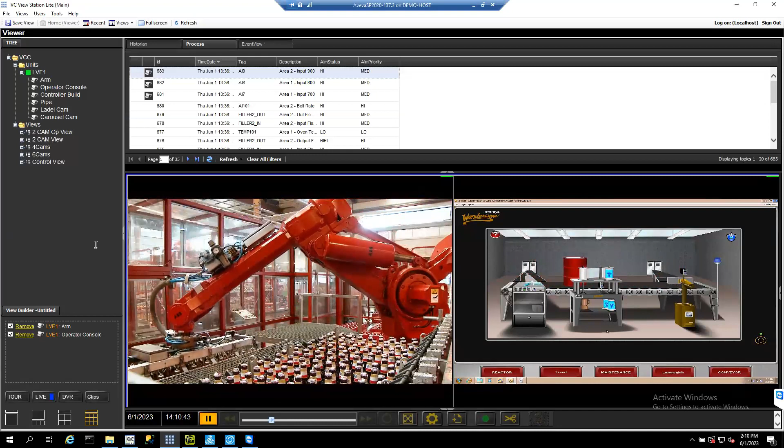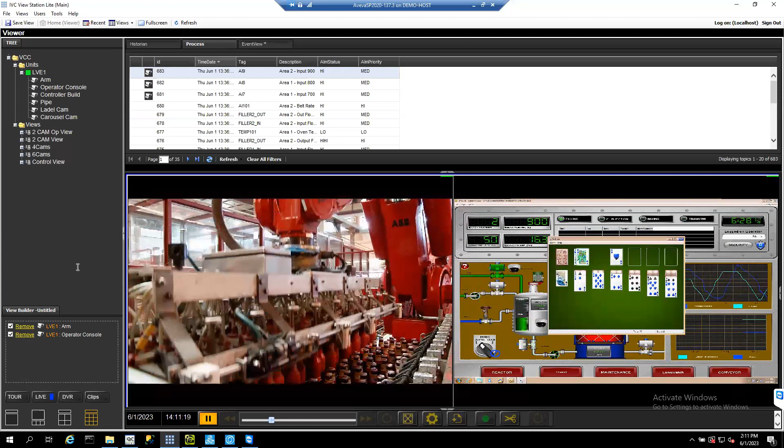This is the interface where operators would interface with the software, access any of the camera streams, whether on-premise or out at different remote sites. What we're looking at today is our software interface called View Station Lite. We also have a browser version of the software, but this VSL is a newer offering with Longwatch, and it gives operators a little more flexibility when it comes to accessing your camera streams and creating different camera views. I'll give you a quick tour of the interface and highlight some of the features.

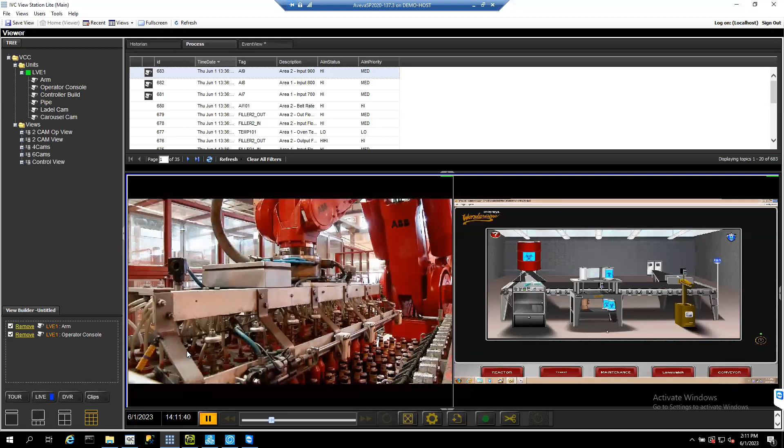Over at the top left is where you would navigate to any of the cameras set up on your system. Below that is the view builder, where you can drag and drop camera streams. Here in the viewer, we're simulating live views of camera streams. Above that, in this tabbed area, is where we're accessing all of the correlation between the video data we're recording and your process control data. I'll go through an example of where we've correlated camera streams to a SQL downtime database, for example, and how you can instantly play back those streams.

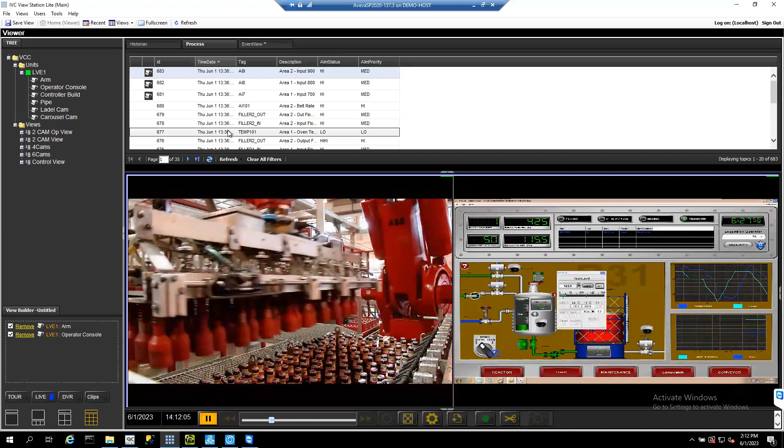Going back over to the top left, as I mentioned, this is the navigator. This is where you can retrieve any of the camera streams that you have on your console. You can select those, and you'll see it in the viewer here. Now, if this were a PTZ, or pan-tilt-zoom camera, you'd be able to move the camera stream or the camera image using your mouse control.

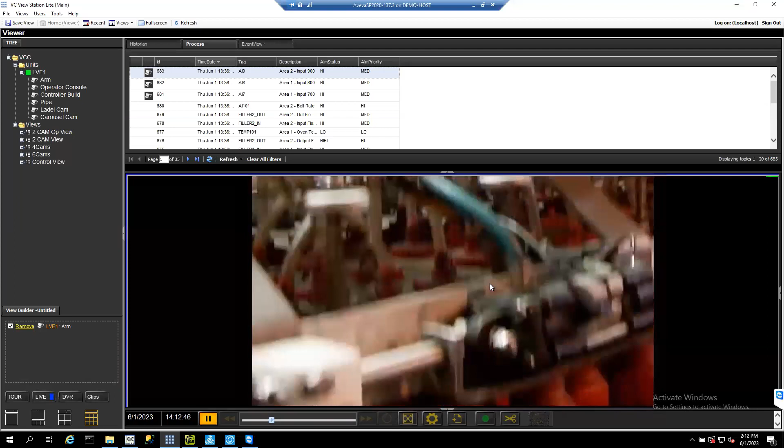There are other things you can do in the viewer, such as a digital zoom. So if you're an operator and you want to get a little more detail of a camera image without using the optical zoom, you could do a digital zoom, and that's what we're showing here. As I mentioned, you can drag and drop other camera streams, so perhaps you have multiple cameras of a process that you want to view together.

You can drag and drop those into the view builder, and now you'll have multiple streams.

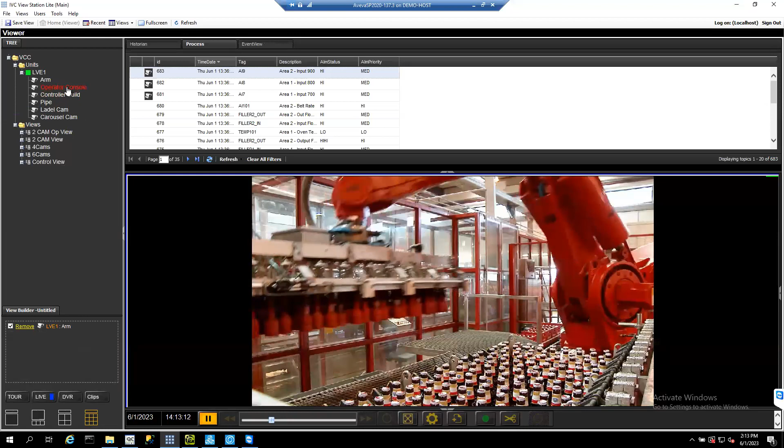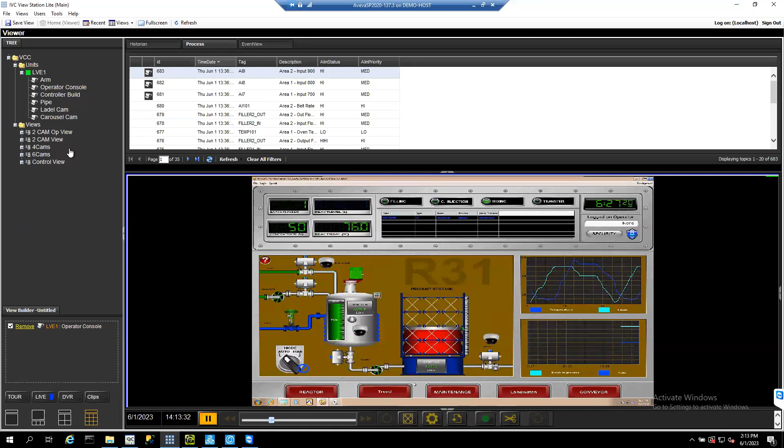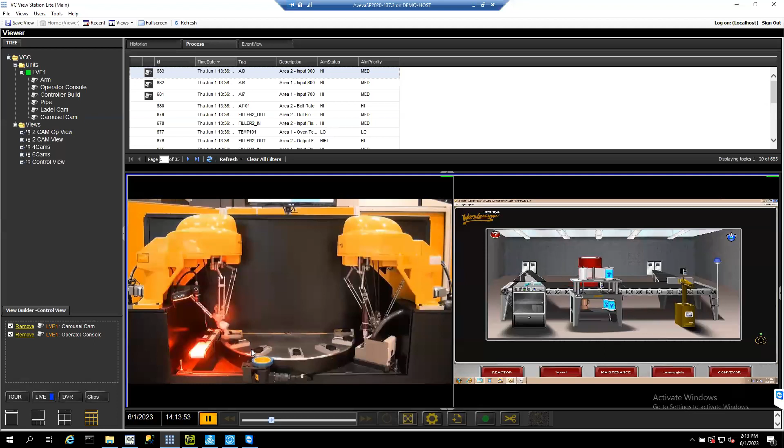One of the things we can also do in our system is, aside from recording camera streams, we can also record HMI consoles. The benefit here is we pull the consoles into our system as if they were just another camera image. This gives you more insight into what operators may be doing on particular lines or what happened during a certain event. So the same way we record video and correlate that to process control upsets or alarms, we can do the same with operator consoles, giving you a complete picture of what occurred on my plant floor or remote site, and what that operator console was experiencing at that particular moment.

So we have live view here, and we can also access DVR function right within the viewer. Here you can do a manual input of time and date. Click submit, and any of the streams currently in that viewer will all jump back and go into DVR mode.

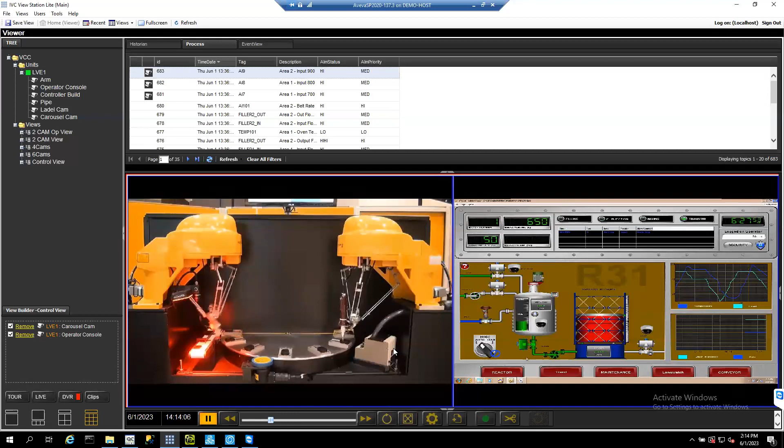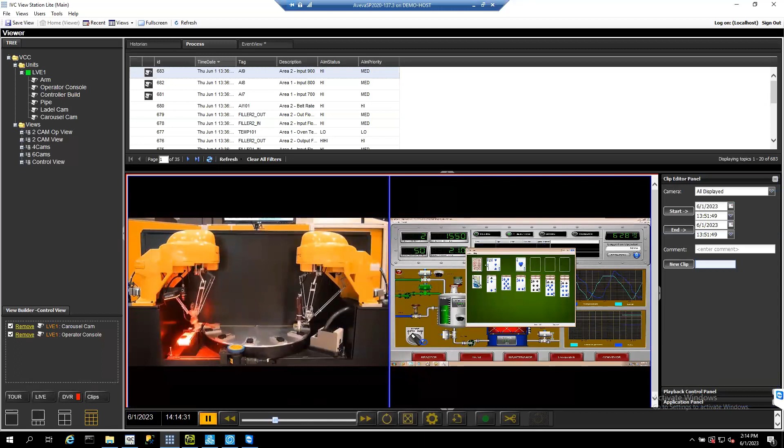So here we can start a synchronized playback, seeing visually what was happening, and also what was occurring on this particular console. There are tons of playback features I won't get into today, like playback speed and being able to extract video from the DVR file to share with team members. Typically we record 24/7, but when some type of upset occurs, you're going to want to extract a portion of that video clip to share or review later.

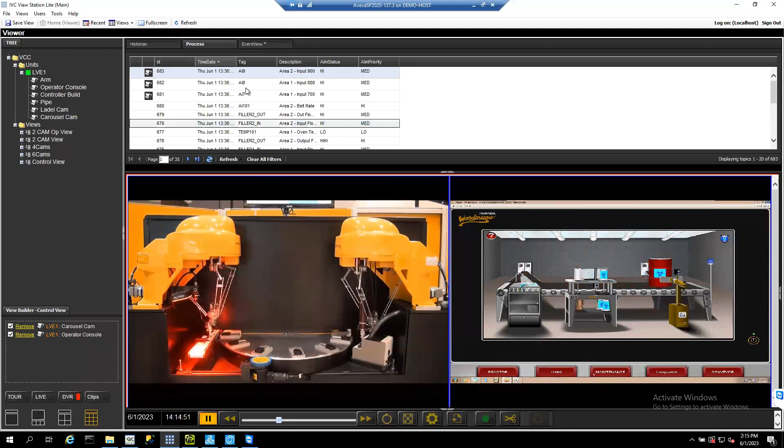So above the viewer is where we access and do the correlation of the video data we're recording to your process control system. I'm going to show you two examples. One is the process tab. Here we're seeing information like tag IDs, descriptions, and alarm conditions, all pulled from your existing database.

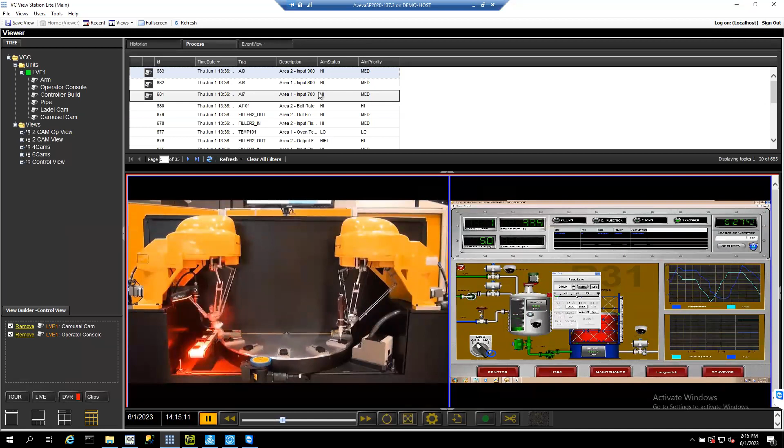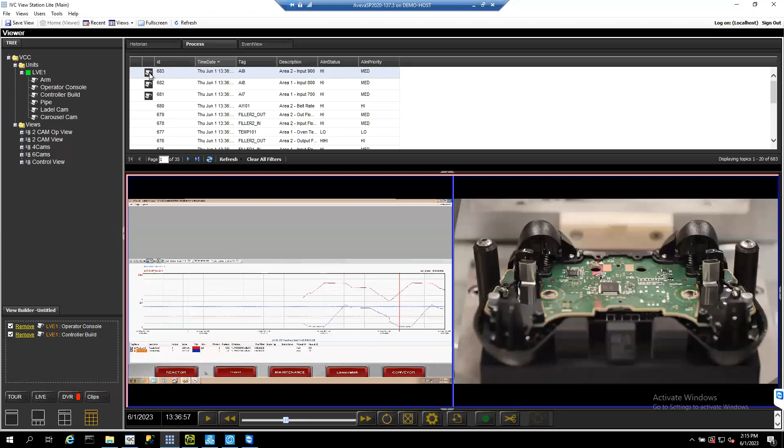This could be an AVEVA historian, for example. On the initial setup, we've correlated any number of camera streams to particular tags. So for instance, I have three examples here. The first tag is AI9. I have a camera icon here telling me I have a camera stream, or multiple streams, associated to this particular tag—here a console and an optical stream. Whenever this tag occurs, you can quickly go back and review visual information correlated to that specific tag.

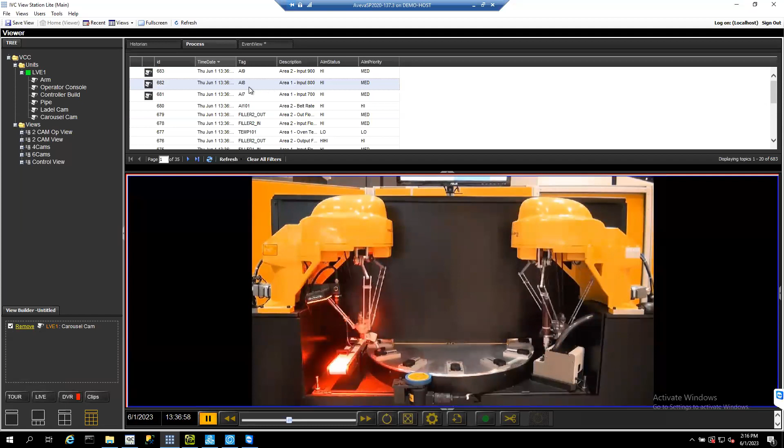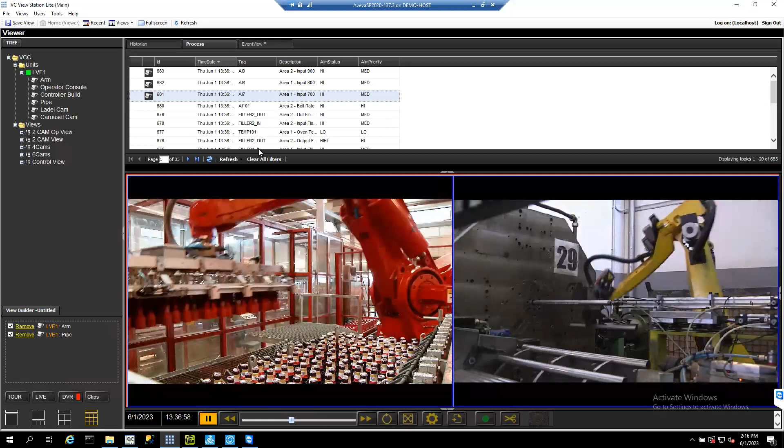These are quick bookmarks on the DVR system giving you quick access to streams related to particular tags. If they're not extractions, it's just a bookmark on the DVR file—a quick way to jump back and see visually what was occurring during particular events. It's a quick way to run through your process, run through any upsets that might occur, and quickly get eyes on and review historical video data correlated to those specific tags.

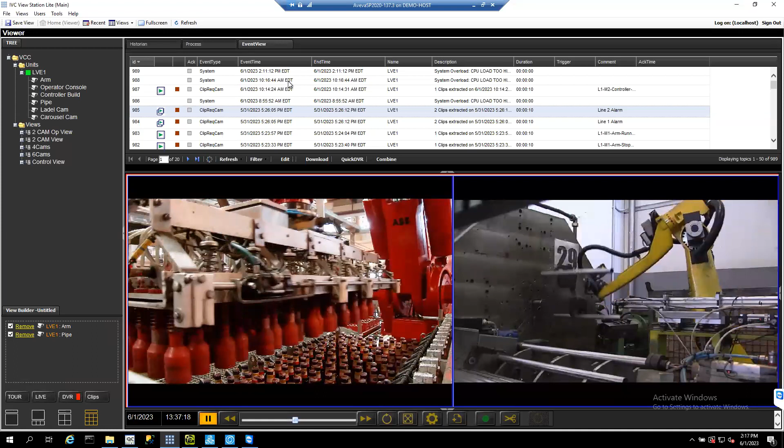The next thing I want to show is the event view, the tab right over from the process tab. This is similar in that we're still getting all those activity identifiers—event name, event time, description, comments. But here we've taken it a step further: instead of just making the correlation to that specific event, we pulled an extraction off of the DVR file. So these are clips we've created that you can quickly share and download with other team members. It takes it a step further from the process tab by creating these extractions, these video clips, ready to share.

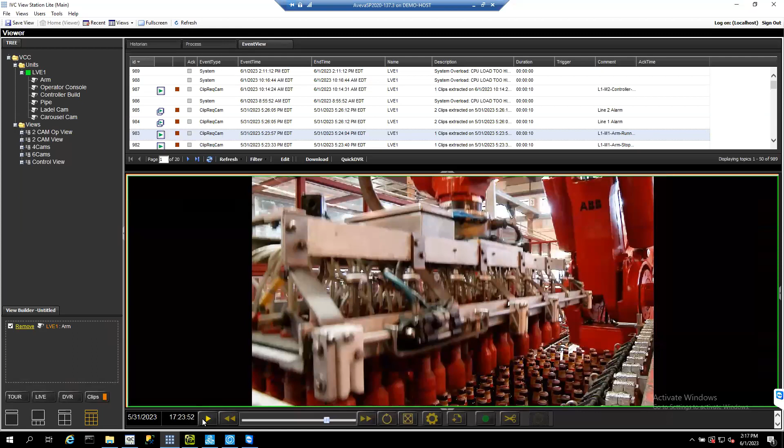You can do singular clips, or if you have multiple cameras and consoles correlated to particular alarms, we've done the extraction for both streams. So here you see a synchronized playback, visually what was happening, and again what that operator was doing during that alarm condition.

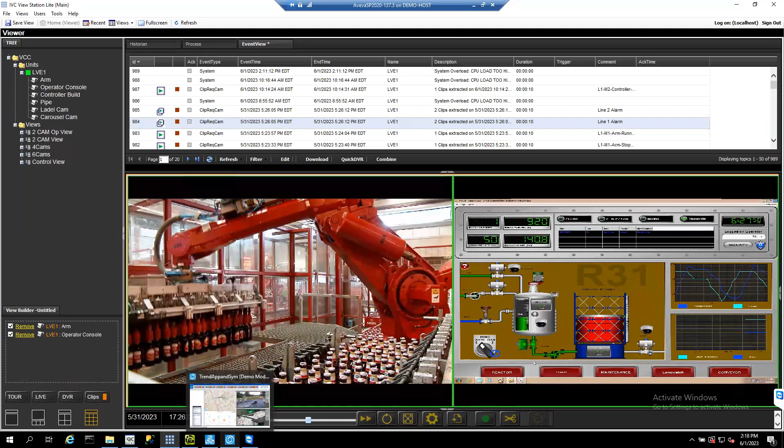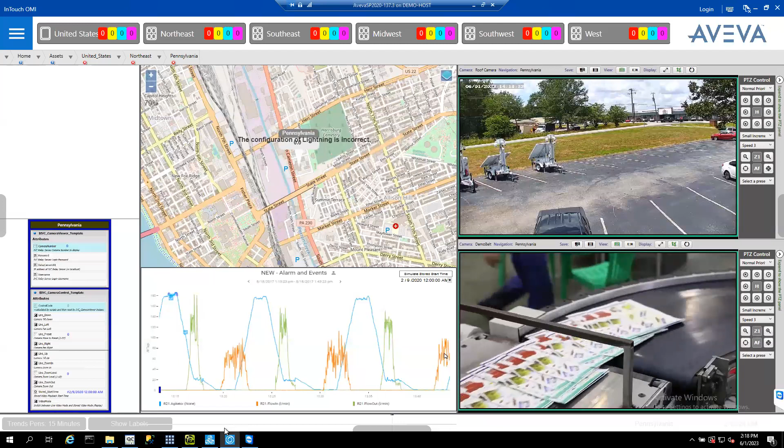Okay, so the next thing I want to jump over to: if there are any OMI users, we've built a video application where you can embed video into the OMI environment. If there are any InTouch users, we can do the same—we can drop in live or recorded video into that InTouch environment. But here we have a new OMI app, which is pretty neat, where we have access to live camera streams.

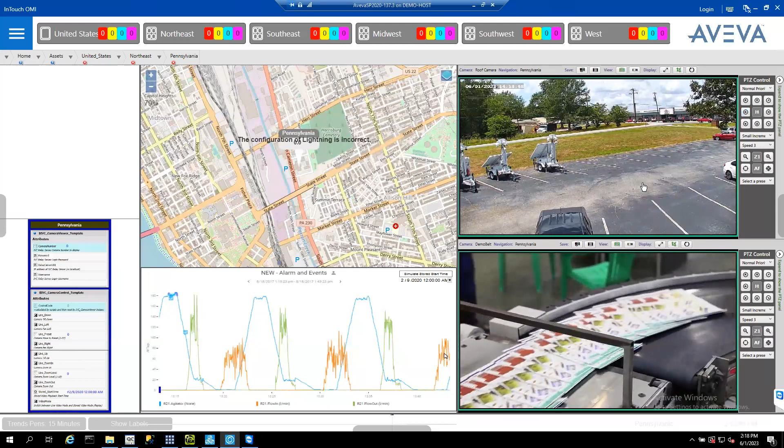We can manually take video snapshots, video clips, access the DVR file, and have all of that information right within OMI. So this is something users can go away from, not just using our interface, but embedding video into the AVEVA environment.

Next, I want to hand over to Leo. Leo is going to show us a new feature in Longwatch called video clipping. With video clipping, operators can easily assign camera streams to alarm conditions, so process control engineers don't have to be involved. This is something they could do out on the plant floor, assigning different camera streams to different alarm conditions. I'll let Leo quickly go through a demo of that.

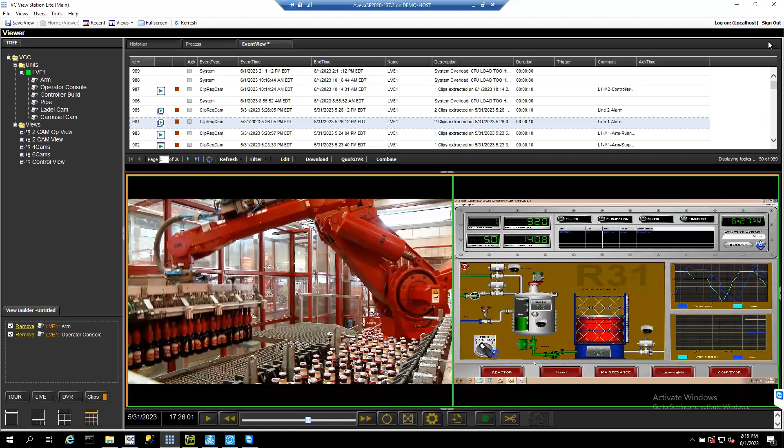Hello, I'm Leo. I'm going to do a quick demonstration about the software called video clipping.

Video clipping has, as you can see, a very similar interface to View Station Lite that Jared was just talking about. You're also going to have your process alarms and event view, and you'll be able to review the events. Click on any event to see, not live video, but small clips about the event that just occurred.

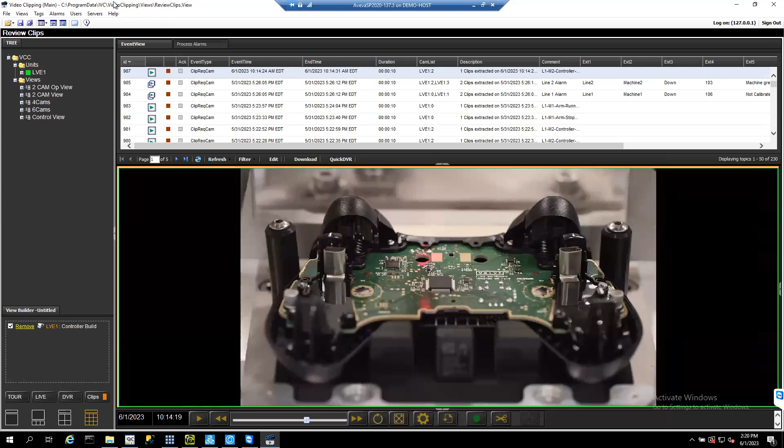We can trigger clips to have a recording of the particular machine and the event that is happening at that time.

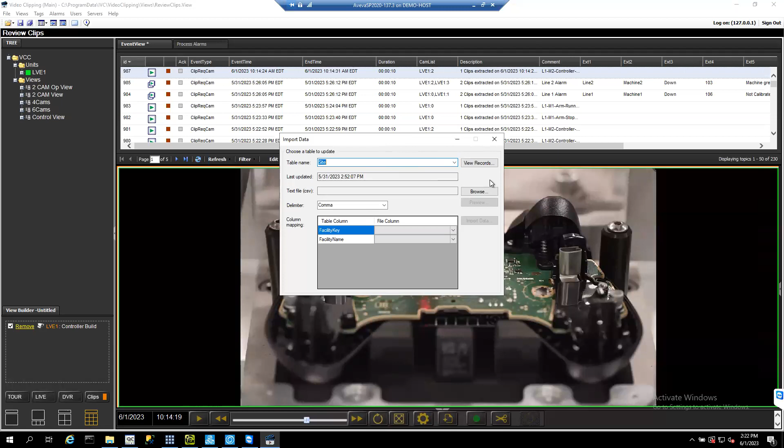What I wanted to show first is that we can import data from any CSV file, to make the creation of these tags in our software a little bit easier, because sometimes you're going to be handling maybe several hundred tags. So if the software you're using allows it, you could export those tags into CSV files, and use our software's import data option to just read those CSV files and import the tags. You can do it easily from here.

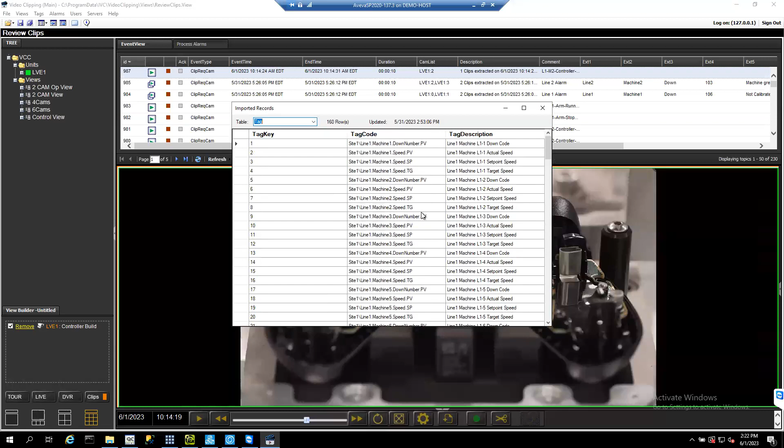After you import, you can also view the data that you have. For example, right now we have all these tags in our software, and we're able to read data coming from any of these tags, and the configuration is actually pretty simple.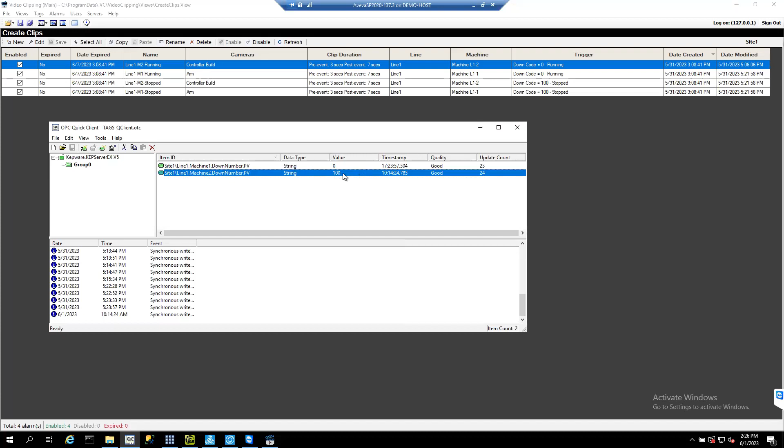So if I go back to my review clips view, where all my events are going to be shown here, we have that. Whenever you get a new alarm, you're going to see it here, and you're going to see the clip associated right here with this little play, this green play button. So let me trigger one alarm.

So I'm going to change this one from code 100 to code 0. That means that this machine is now running. So we should be getting a new event here any second now. There we go, this is our new event at 2:27 p.m. If I click on the green play button, you're going to see the small clip associated with the event, and it's going to be a 10 second clip.

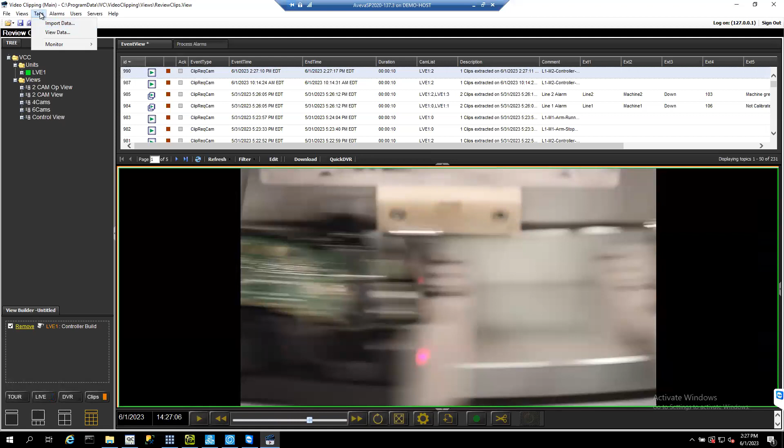Now, as I said, you can always associate multiple cameras, and that's easy to do. Oh sorry, this is not the one, you go back to create clips. You double click on the alarm. Let me do, this is machine 2 running, let's do machine 2 stop. So I'm going to click the another camera.

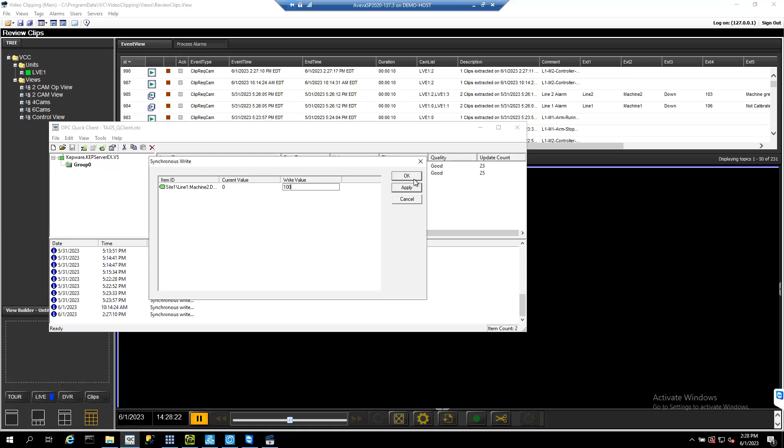So now we have 2 cameras on this alarm. I'm just going to click OK, I'm going to save, and I'm going to go back to my review clips. Go to my event view, and now if I change this value to 100, which is the down code for stopped, now we should get a new clip with a new event with 2 clips on it.

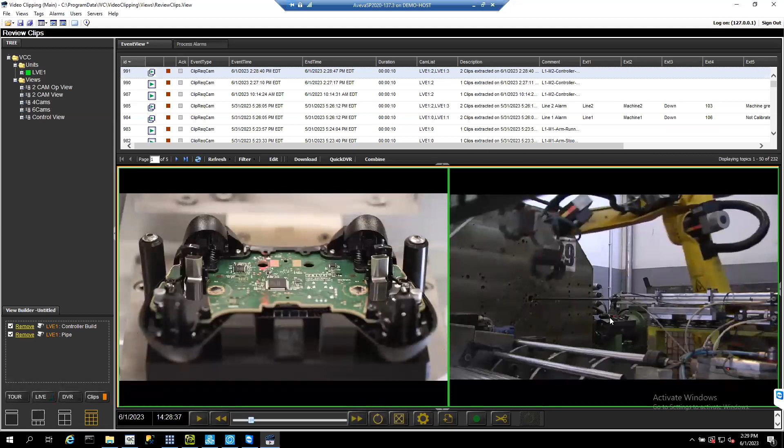There we go, we have the new event. The clip is being processed right now, we need to wait a little bit. There we go, now you can see that the icon is different, meaning that we have multiple clips. If we click on it, we're going to see 2 different clips, and they are both going to be on the same timestamp.

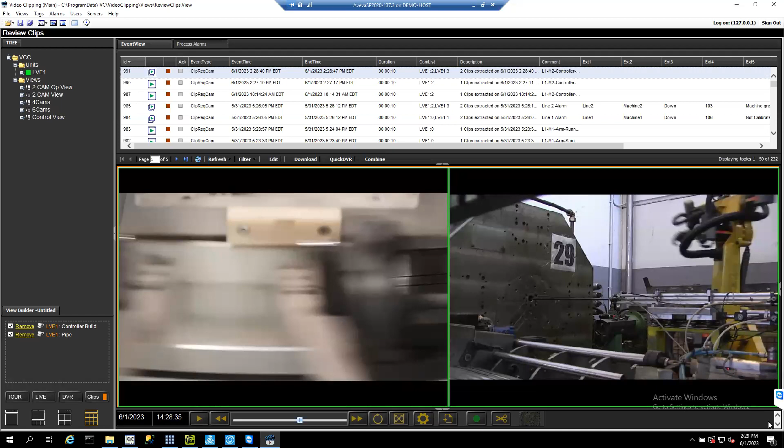Someone asked, can your systems integrate with third-party cameras? So yeah, we can work with newer third-party cameras. Typically we want to look for the ONVIF protocol. That's just a protocol that goes between camera hardware and camera management software, just to ensure that there's proper communication. But the short answer is yes, typically.

Okay, and then another one came in. How much storage space is needed for the video files? So we're generally recording video 24/7. So what we'd like to do is get a pretty good idea of your period of retention. So if you tell us you want 7 days, 14 days of storage space, what we'll do is we'll make some calculations based on the number of cameras, the resolution, the frame rate, and then we can recommend storage space based on that.

Awesome, and then I think we have time for this one last one. What communication protocols are used to connect to a process control system? So as Leo mentioned, he did a little bit with OPC, but we use industry standard protocols. So it could be Modbus, TCP, Ethernet IP, but most commonly we see OPC used.